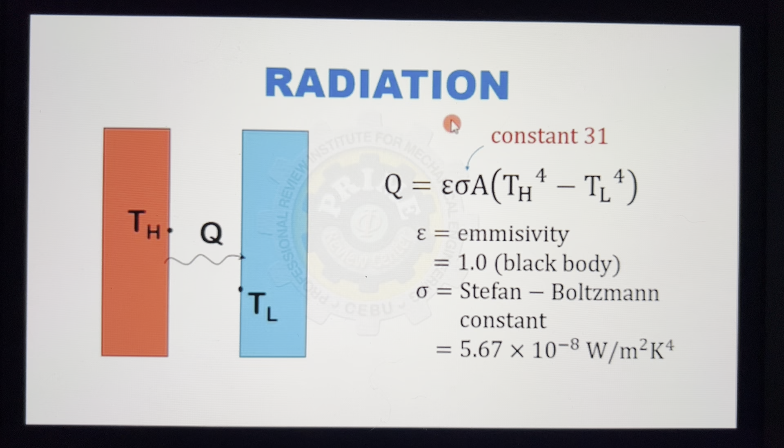So since tapos na tayo sa 3 modes of heat transfer, conduction, convection, and radiation, pupunta na tayo ngayon sa application ng heat transfer, which is the heat exchangers. Okay, so a heat exchanger is a device used for heat transfer between two fluids.

So we have several examples. One is evaporator. So sa evaporator, heat is being transferred from the food to the refrigerant, kung sa refrigeration application. Then meron din tayong boiler. So sa boiler, heat is being transferred from the hot gases due to combustion to the water. Kaya nagiging steam yung water paglabas ng boiler.

Then meron tayong condenser. So heat is being transferred from the hot fluid sa loob ng condensing tubes to the cooling water outside the condensing tubes. Then meron din tayong radiator. So yung heat transfers from the hot fluid sa loob ng tube palabas dun sa air around the radiator. So these are some examples of heat exchangers.

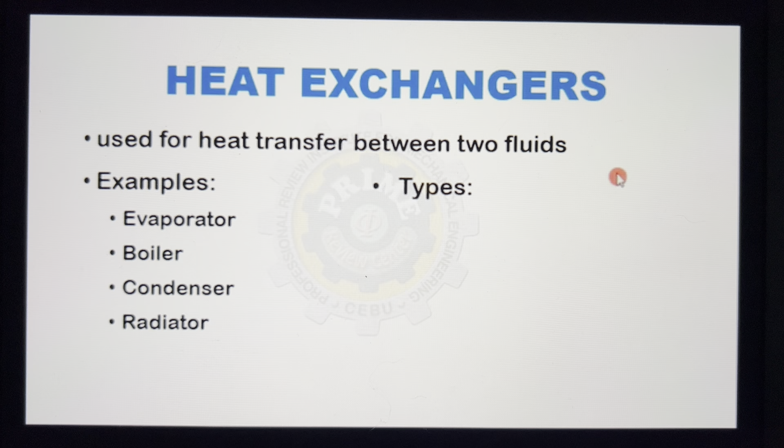Now punta naman tayo sa types. So meron tayong bare tube type. From the name itself, puro tubes lang. Then meron tayong shell and tube type. One example is yung mga condensers ng power plant. Then meron din tayong finned tube type. So para mas maging efficient yung heat transfer, yung bare tube nilalagyan ng fins. Just like yung radiators ng mga sasakyan.

Then meron naman tayong plate and tube type na heat exchanger. One example is yung evaporator ng isang household refrigerator. Okay, so even though we have several types of heat exchangers, iisa lang yung kanilang purpose, and that is to carry out heat transfer between the two fluids.

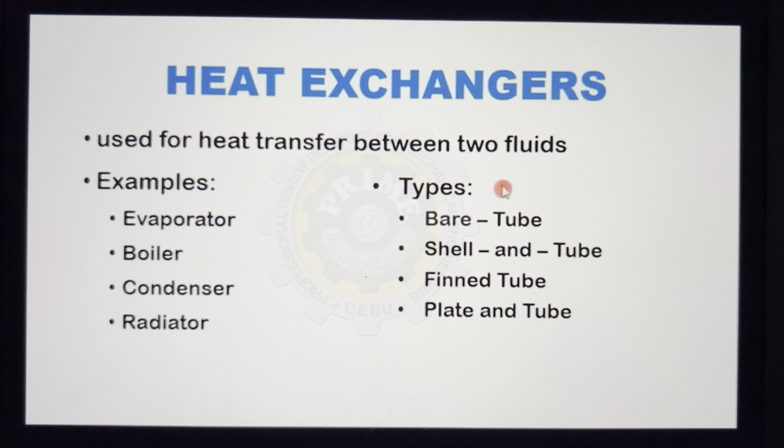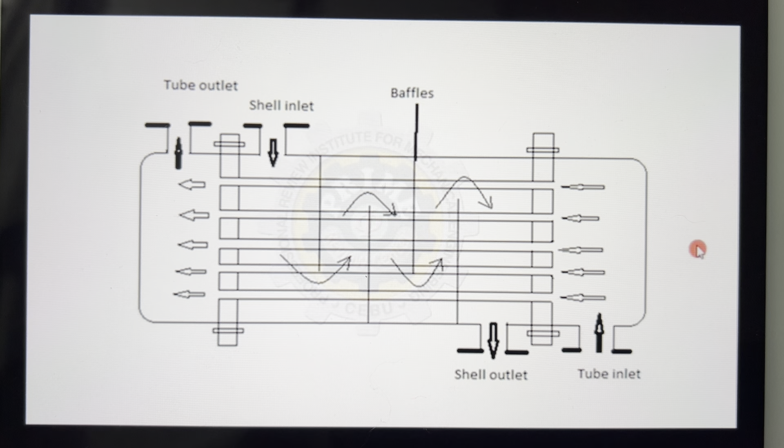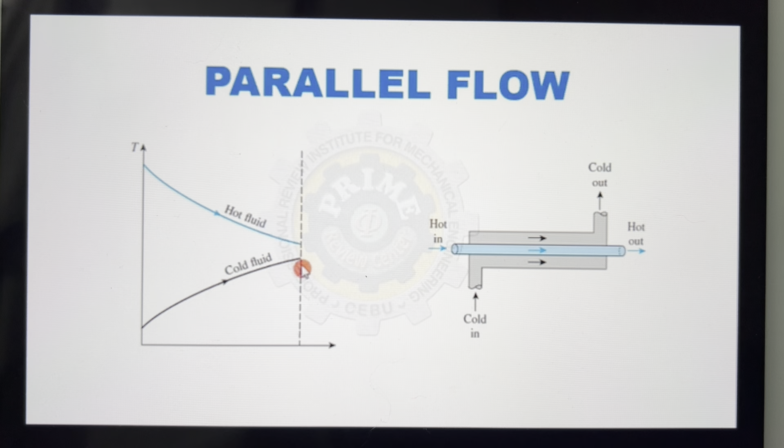Now, kung titingnan naman natin yung graph ng kanilang flow, so ito yung sa hot fluid, then yung nasa ilalim is yung cold fluid. So again, the same direction nila. Then yung hot fluid enters the heat exchanger at a high temperature. Then since meron siyang heat exchange with the cold fluid, lalabas siya at a lower temperature. So the same thing sa cold fluid, papasok siya ng heat exchanger at a low temperature, then tataas paglabas, since meron siyang heat transfer with the hot fluid. Okay, so again, kapag parallel flow, the same yung direction ng flow ng hot sa cold fluid.

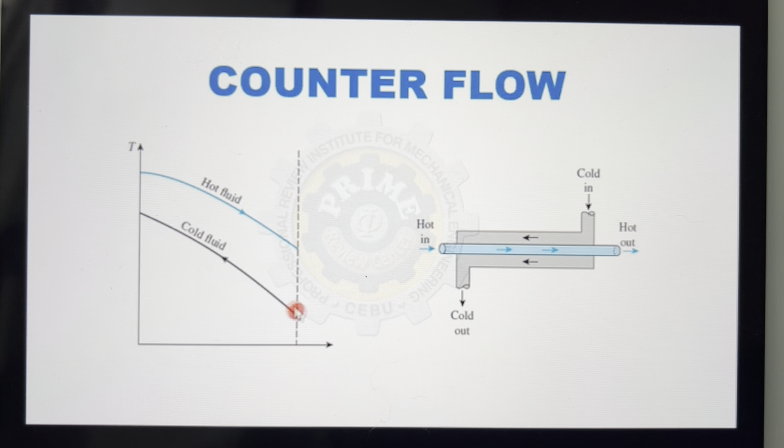So opposite na. Though ganun pa rin, yung hot fluid enters at a high temperature, then lalabas at a lower temperature. Yung cold fluid naman, papasok at a low temperature, then lalabas at a higher temperature. Okay, so na-review na natin yung basic ideas about heat exchangers. Pwede na tayong mag-proceed sa calculation ng heat transfer.

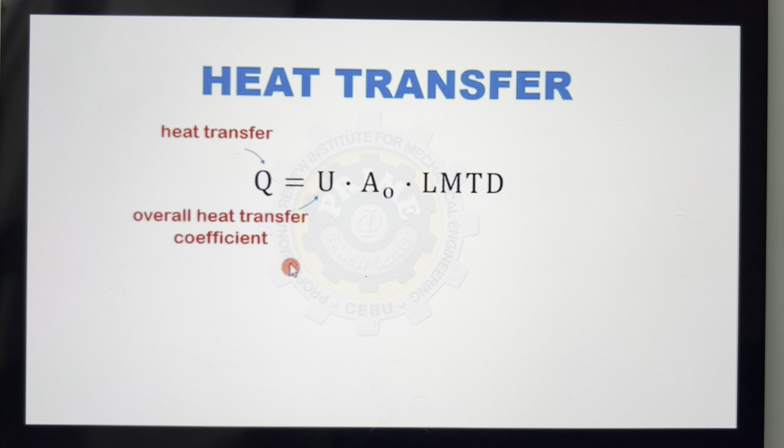A sub O is the tube's total outside surface area. So again, kapag sinabi nating tube's area, kapag heat transfer, we are referring to the tube's surface area. So do not misinterpret it as the cross-sectional area. So kapag surface area, ang formula is pi times the tube's diameter, then times the length. So that is the circumference ng tube times the length of the tube. Then yung LMTD naman is the logarithmic mean temperature difference.

Okay, so sa design problems kapag heat exchanger, ang usual na pinapahanap is the total surface area required for the tube. So para malaman natin yung total surface area, we have to know first yung rate of heat transfer between the two fluids. So kailangan ma-identify muna natin yung Q.

Then kailangan alam din natin ang overall heat transfer coefficient. So depende yan sa pipe material. Usually, given na yan sa problem. Pero if not, meron tayong formula, makikita lang natin later. Then kailangan alam din natin yung target na logarithmic mean temperature difference. Okay, so meron tayo nito later.

Okay, take note na sa isang heat exchanger, yung Q ng fluid 1 is equal to Q ng fluid 2. Or that is, the heat rejected by the fluid 1 is equal to the heat absorbed by the fluid 2, assuming na walang heat losses.

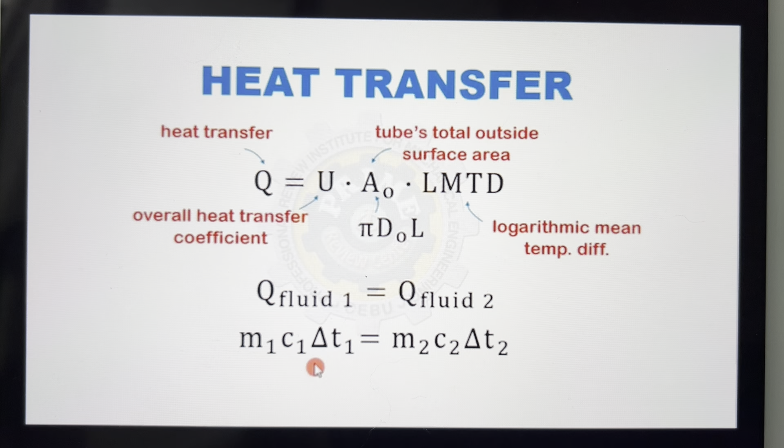Okay, so yung Q ng fluid 1, we can use the fundamental equation for the heat sa ating thermodynamics, di ba? MC delta T. So that is mass flow rate ng fluid 1 times yung specific heat ng fluid 1, then times yung change in temperature ng fluid 1. And that should be equal to the mass ng fluid 2, then times the specific heat ng fluid 2, then times yung change of temperature ng fluid 2.

So ibig sabihin pala, yung heat transfer na rate, pwedeng Q ng fluid 1 or yung Q ng fluid 2. Kasi equal lang naman sila, assuming na walang heat losses.

Okay, so punta tayo ngayon sa overall heat transfer coefficient. It is actually the reciprocal of the total thermal resistance ng pipe, including yung fluid inside and outside the pipe. Okay, so usually, given ito sa problem, pero if not, you can use the following formulas.

Okay, so if tube is new, you can use this formula. So again, reciprocal ng thermal resistance yung overall heat transfer coefficient. Now, since yung material natin is a tube, maa-apply natin yung na-review kanina for the heat transfer across a pipe.

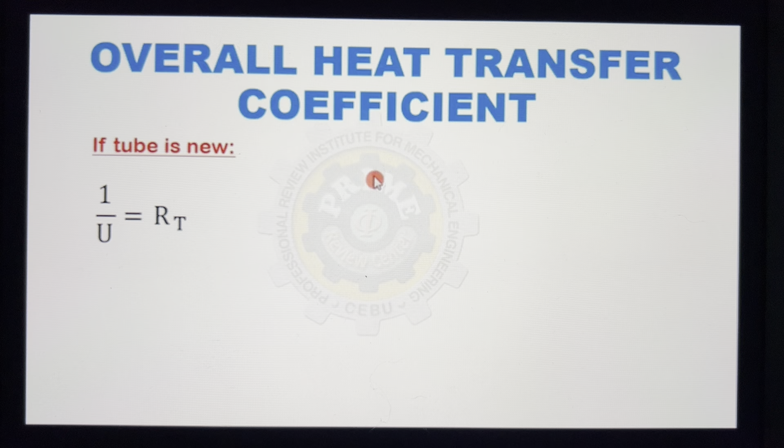Okay, so yung total resistance is equal to 1 over the inside surface area ng pipe, then times yung inside film coefficient. Or that is the film coefficient of the fluid sa loob ng pipe. Then plus yung thermal resistance ng pipe material.

Okay, so Ln, the outer diameter divided by the inside diameter, divided by 2 pi, then times the thermal conductivity, then times the length of the pipe. Okay, then plus the thermal resistance ng fluid outside the pipe, that is 1 over the outer surface area, then times the outside film coefficient. So that is if the tube is new.

Now if the tube is old, merong mga fouling substance na namumuo sa inside surface and the outer surface ng tube, which is caused by the impurities ng mga fluid na dumadaan sa tube. Okay, so if we let F as the fouling factor, which is supposedly given sa problem, yung magiging formula natin for the overall heat transfer coefficient is 1 over U is equal to the total thermal resistance, including yung fouling factor.

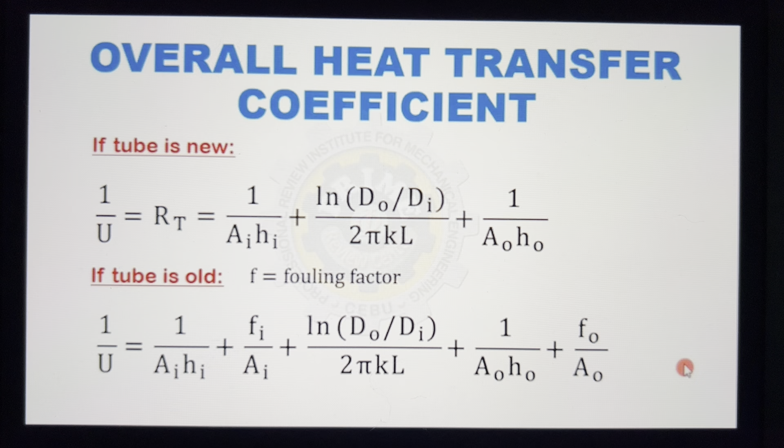So actually, the same formula lang sa taas, pero dinagdagan natin ng fouling factor inside divided by the inner surface area. Then, plus fouling factor outside divided by the outer surface area ng tube. Okay, so again, yung overall heat transfer coefficient is usually given sa problem, pero if not, you can use these following formulas. So kapag walang fouling factor na given sa problem, ibig sabihin, it is assumed sa problem that the tube is new.

Okay, so let's have the logarithmic mean temperature difference or the LMTD. So, examine natin sa parallel flow. Review lang, kapag sinabing parallel flow, dapat yung flow ng dalawang fluids are in the same direction. Okay, so before natin ma-determine yung LMTD, we have to identify first yung mga entrance saka mga exit temperatures ng dalawang fluids.

So, for the hot fluid, let natin na TIH be the inlet temperature. Then, TOH be the exit temperature or the outlet temperature. For the cold fluid naman, let natin na TIC be the inlet temperature. Then let natin na TOC be the outlet or the exit temperature.

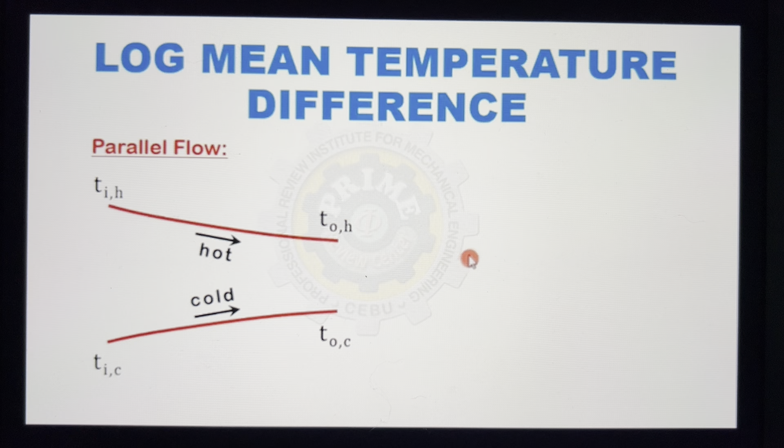So, kailangan ma-identify din natin yung mga terminal temperature difference. So, meron tayong dalawang terminal temperature difference. So, let natin na delta T1 be the terminal temperature difference between the inlet temperatures ng hot saka ng cold fluid. Then, let natin na delta T2 be the terminal temperature difference between the exit temperature ng dalawang fluids. Okay, so magagamit natin yan in calculating the LMTD.

So, yung delta T1 is TIH minus TIC. Then, yung delta T2 naman is TOH minus TOC. Then, yung formula natin for LMTD, that is delta T1 minus delta T2 all over ln delta T1 over delta T2. Okay, so pwede yan silang mag-interchange actually, pero dapat consistent.

Kung nauna yung delta T1 sa numerator, dapat mauna rin ang delta T1 sa denominator. Then kapag nauna naman ang delta T2, dapat mauna rin ang delta T2 sa denominator. So magiging delta T2 minus delta T1 over ln delta T2 over delta T1. So para hindi maging negative ang LMTD.

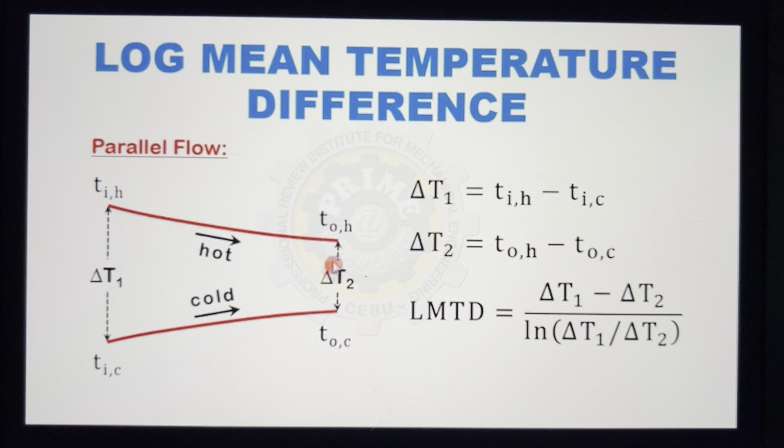Okay, how about sa counterflow? Actually, the same formula lang, pero nagkaiba lang sa delta T1 at delta T2 or sa terminal temperature difference. Kung babalikan natin ang parallel flow, yung delta T1 natin is inlet temperature minus inlet temperature, tapos yung delta T2 is outlet temperature minus outlet temperature, kasi nga same yung direction ng flow ng dalawang fluids.

Dito naman sa counterflow, since opposite yung direction nila, yung delta T1 natin ay magiging outlet temperature ng hotter fluid minus inlet temperature ng cooler fluid. Tapos yung delta T2 ay magiging inlet temperature ng hotter fluid minus outlet temperature ng colder fluid. Pwede rin naman natin baliktarin, hindi naman magmamatter - pwedeng delta T1 is inlet ng hotter minus outlet ng cooler, or delta T2 is outlet ng hotter minus inlet ng cooler.

Okay, so yung LMTD is ganun pa rin: delta T1 minus delta T2 divided by ln of delta T1 over delta T2.

Now let us observe what will happen kapag nag-equal yung terminal temperature differences. So if yung delta T1 is nag-equal sa delta T2 - merong mga cases na ganon - ang mangyayari sa numerator is delta T1 minus delta T2 is magiging 0 kasi nga equal yung dalawa. Tapos sa denominator, ln of delta T1 over delta T2, since equal silang dalawa, magiging ln of 1, which is also equal to 0. So yung LMTD natin is magiging 0 over 0.

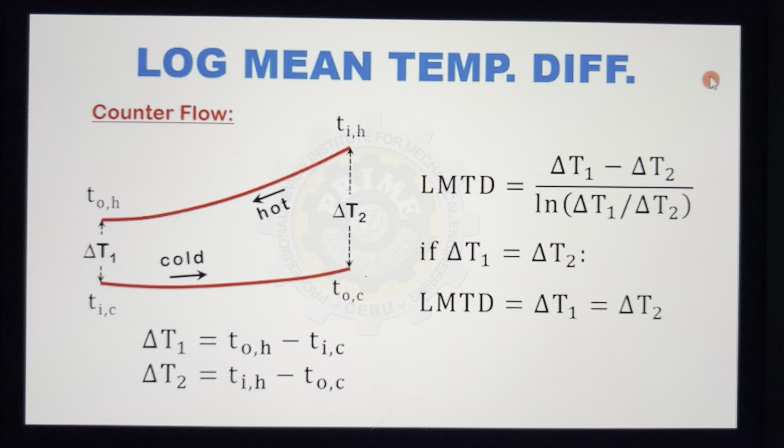Okay, so we're through with the logarithmic mean temperature difference. Meron tayong another type ng temperature difference, which is called the arithmetic mean temperature difference. Sa design problems involving heat exchangers, ang usual talaga na ginagamit is the LMTD, but there are problems which will require you to use arithmetic mean temperature difference. Para makuha natin yung AMTD, just like sa pagkuha ng LMTD, we have to identify first yung mga terminal temperature differences, both for parallel and counter flow. Tapos para makuha yung AMTD, just take the average of the terminal temperature differences - AMTD is equal to delta T1 plus delta T2 all over 2.

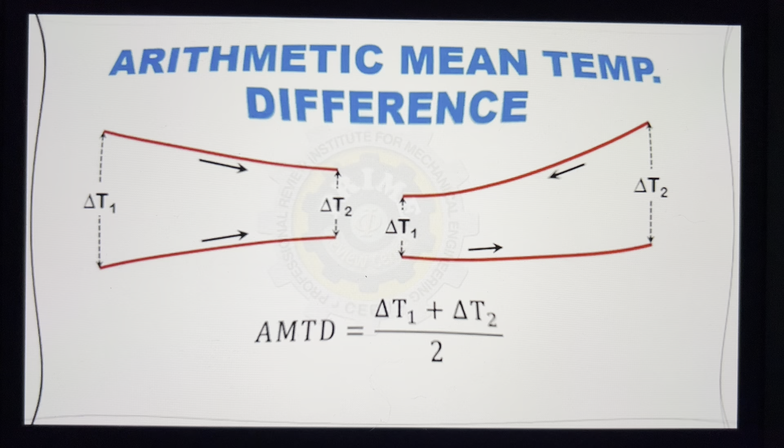Okay, example ng heat exchangers na problem: an economizer receives hot gas, given yung kanyang specific heat, 1.13 kilojoule per kilogram Kelvin, and water in the ratio of 1.5 kilogram gas per kilogram water. Ito yung ratio ng mass flow rate ng gas sa mass flow rate ng water - mass ng gas over mass ng water is equal to 1.5. The gas enters at 454 degrees Celsius, then leaves at 179 degrees Celsius. The water enters at 48 degrees Celsius. Find the logarithmic mean temperature difference for parallel flow. Okay, so pinapahanap yung LMTD for parallel flow. The final answer is 127.62 degrees Celsius.

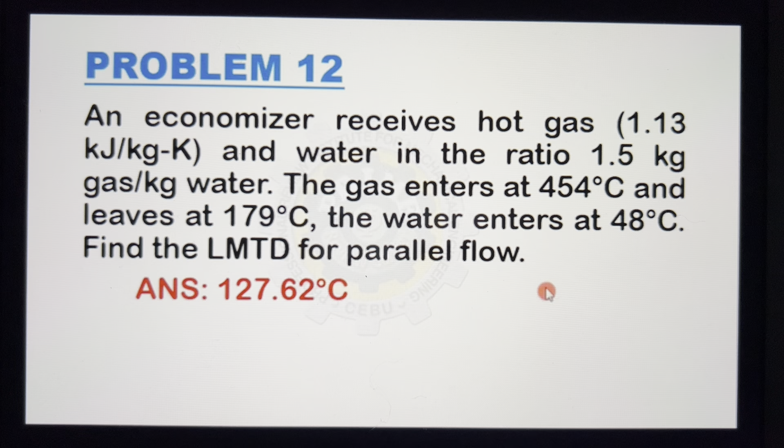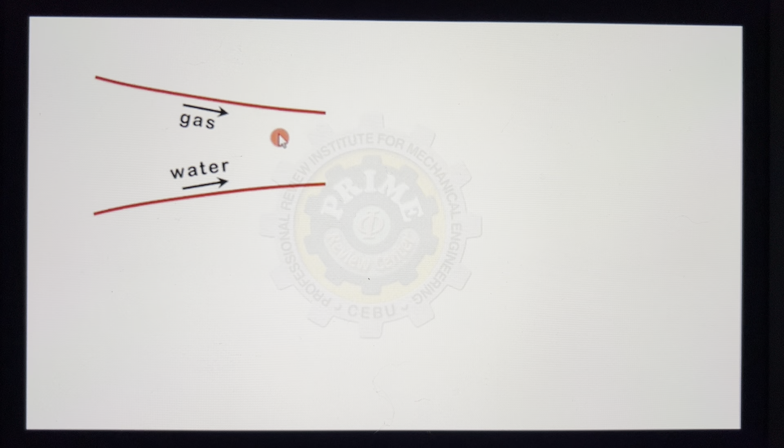Okay, so para mas madali, i-illustrate natin yung problem. Sinabi sa problem na yung flow is parallel, therefore yung direction ng pag-flow ng gas at ng water should be the same. Sinabi sa problem na yung gas is entering at 454 degrees Celsius, then leaving at 179 degrees Celsius. Tapos yung water enters at 48 degrees Celsius, hindi binigay yung leaving or outlet temperature ng water, so let natin yan as X.

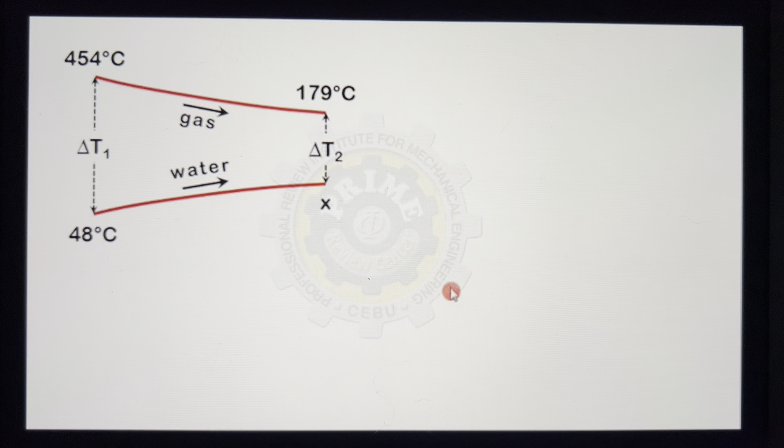So diba, para malaman natin yung LMTD, kailangan i-identify muna natin yung mga terminal temperature differences - we have delta T1 and delta T2. Hindi natin malalaman yung delta T2 kapag hindi natin alam yung outlet temperature ng water. So paano natin malalaman yung outlet temperature ng water?

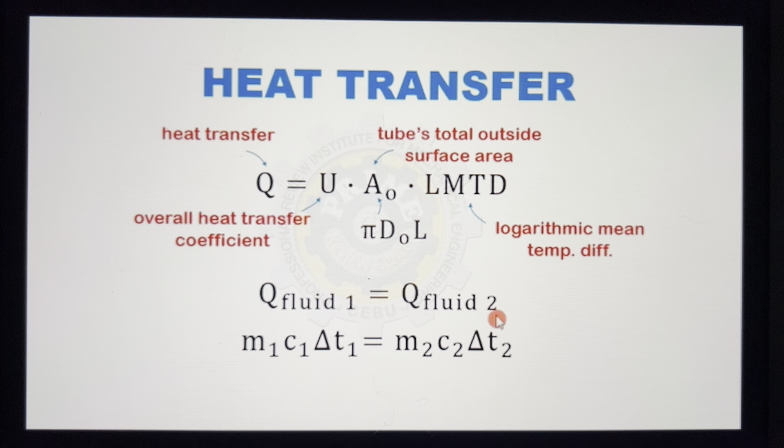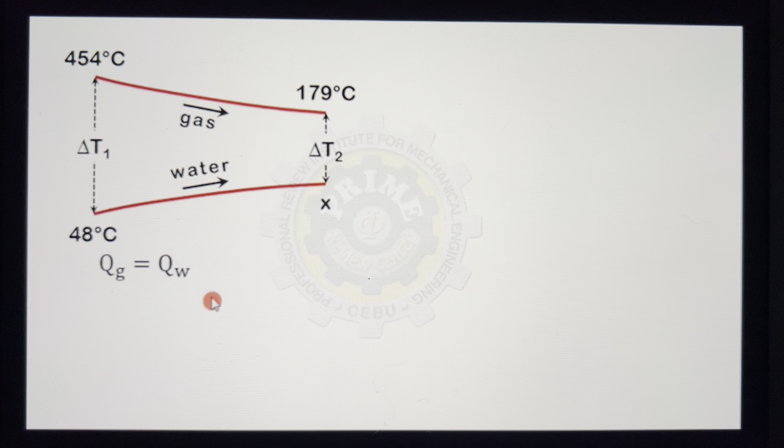Na-mention ko kanina, if you remember, sa heat exchangers, kapag walang heat losses, yung Q released by the fluid 1 is just equal to the Q absorbed by the fluid 2. Going back dun sa ating problem, yung Q na nirelease ng gas is just equal to the Q absorbed by the water. Rewrite natin o expand natin - yung Q ng gas is actually yung mass ng gas times yung C or specific heat ng gas times the change in temperature ng gas, and that is equal to mass ng water times the specific heat ng water times yung change in temperature ng water.

Okay, so take note, we are not given the mass of the gas and the mass of the water. But we are given the ratio of mass of gas to mass of water, or mg divided by mw, and that is equal to 1.5.

So 1.5 times the specific heat of the gas, which is equal to 1.13 kilojoule per kilogram Kelvin, then times the delta T of the gas, that is 454 minus 179. And that is equal to the specific heat of water, which is constant. In SI, the value is 4.187 kilojoule per kilogram Kelvin, then times the change in temperature of the water, so that is X minus 48 degrees Celsius.

Take note, the temperature X, or the leaving temperature of the water, should be larger, since the heat transfer is from gas to water. So the water will absorb heat, therefore the temperature will really increase. That is why we wrote the delta T of water as X minus 48. So from this equation, we can solve for the outlet temperature of the water, which is equal to 159.33 Celsius.

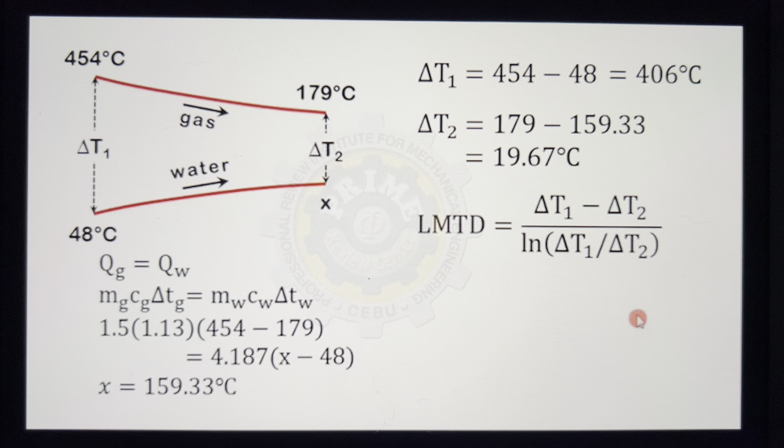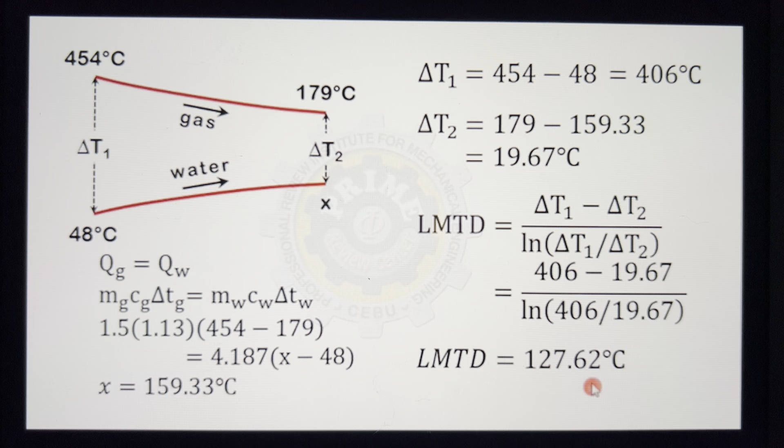The formula for LMTD is delta T1 minus delta T2, all over ln of delta T1 over delta T2. So just plug in to the equation, 406 minus 19.67 all over ln of 406 over 19.67. Then the logarithmic mean temperature difference will be, using your calculator, 127.62 degrees Celsius. So this is the final answer.

Okay, so next, problem number 13. A liquid-to-liquid counterflow heat exchanger is used to heat a cold fluid from 120 degrees Fahrenheit to 310 degrees Fahrenheit. Assuming that the hot fluid enters at 500 degrees Fahrenheit and leaves at 400 degrees Fahrenheit, calculate the logarithmic mean temperature difference for the heat exchanger.

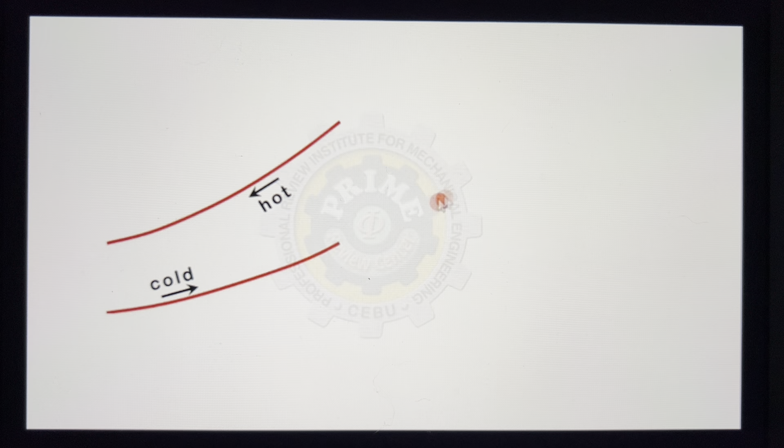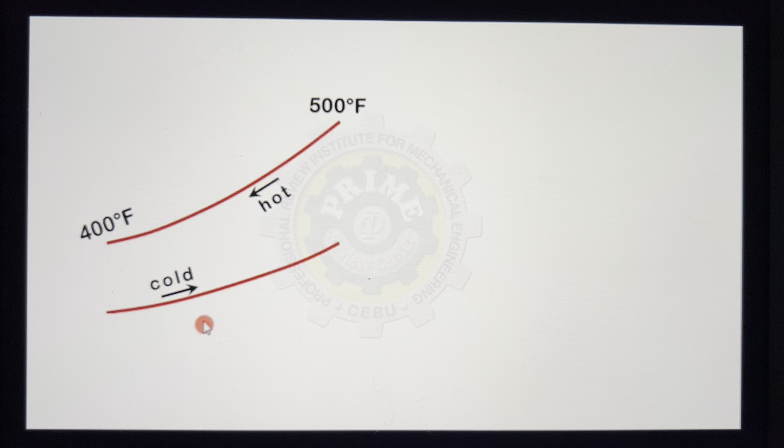Okay, so we are asked for LMTD again, but take note that the type of flow is counterflow now. So in counterflow, the direction of the fluids should be opposite. The hot fluid goes from right to left, while the cold fluid goes from left to right. So given, the inlet temperature of the hot fluid is 500 degrees Fahrenheit, while its outlet temperature is 400 degrees Fahrenheit. For the cold fluid, the inlet temperature is 120 Fahrenheit, while the outlet or exit temperature is 310 Fahrenheit.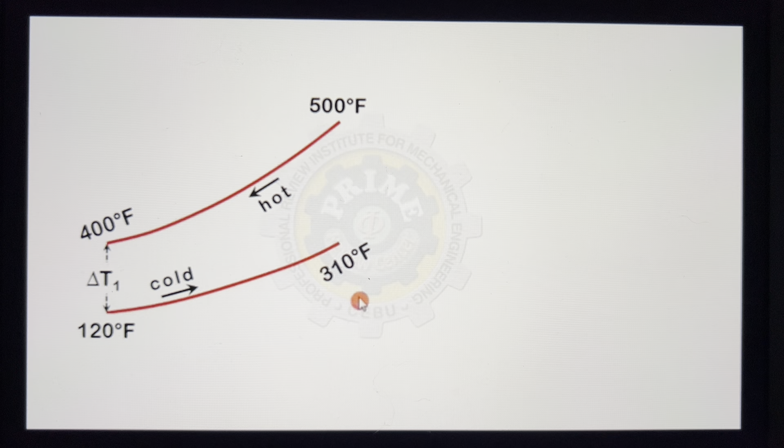So just like the previous problem, we have to first identify the terminal temperature differences, delta T1 and delta T2. Starting with delta T1, that is 400 minus 120, which is equal to 280 Fahrenheit. While delta T2 is 500 minus 310, which is equal to 190 Fahrenheit.

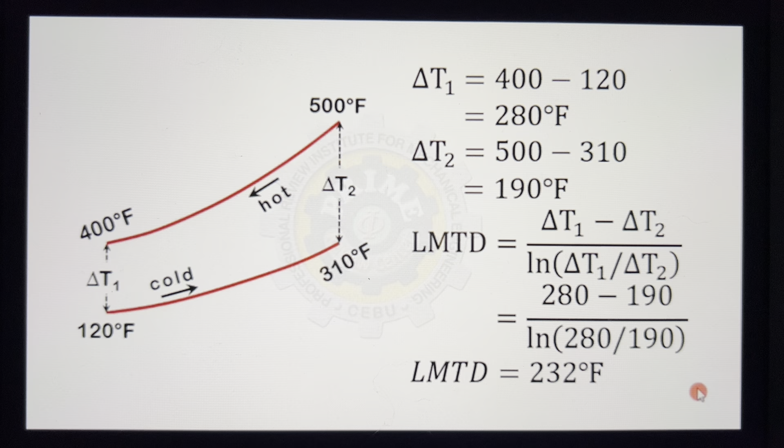Using the same formula for LMTD, we have LMTD equal to delta T1 minus delta T2 over ln of delta T1 over delta T2. Plugging in the terminal temperature differences, LMTD is equal to 280 minus 190 all over ln of 280 over 190. Using your calculator, you should get the LMTD as 232 degrees Fahrenheit. So going back to the problem, our final answer should be letter B.

Okay, so last problem, we have problem number 14. What is the logarithmic mean temperature difference in degrees Celsius of a double pipe counterflow heat exchanger, where a fluid enters at 90 degrees Celsius and exits at 50 degrees Celsius? This refers to the hotter fluid. Then, inside the inner pipe, another fluid enters at 20 degrees Celsius and exits at 60 degrees Celsius. This is the cooler fluid.

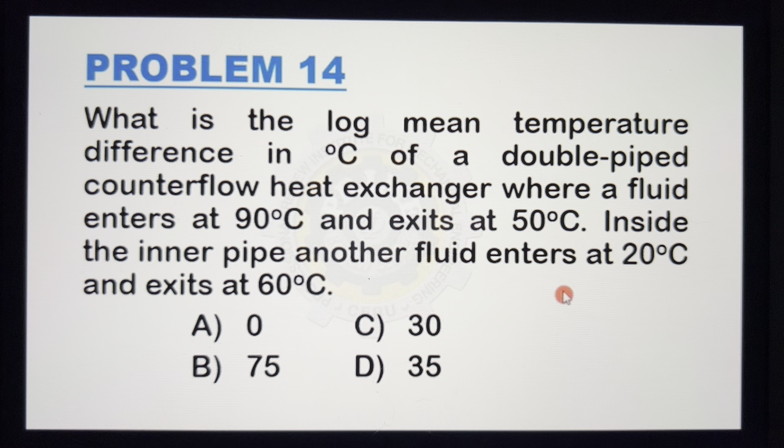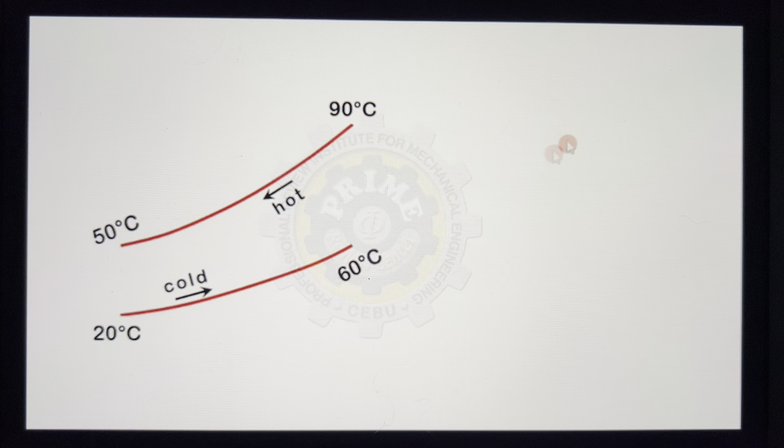So let's illustrate: the hotter fluid enters at 90 Celsius, then leaves at 50 Celsius, while the colder fluid enters at 20 Celsius, then leaves at 60 degrees Celsius. We are still asked for LMTD. Now take note that the type of flow is counterflow, which is why the directions of their flows should be opposite. Let's start by getting the terminal temperature differences.

So we have delta T1 equal to 50 minus 20 Celsius, which is equal to 30 degrees Celsius. Next, delta T2 is 90 degrees Celsius minus 60 degrees Celsius, which should also be equal to 30 degrees Celsius. If you remember the concept we discussed earlier, in case delta T1 equals delta T2, our LMTD is either delta T1 or delta T2, since they are the same. So our final answer, LMTD is equal to 30 degrees Celsius.